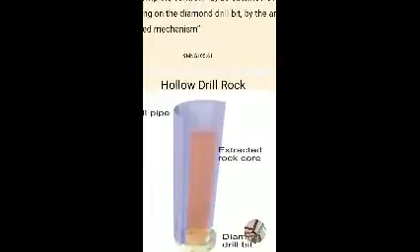There are two types of feed mechanisms. I would like to tell those mechanisms a little while after. To understand easily, here is a figure.

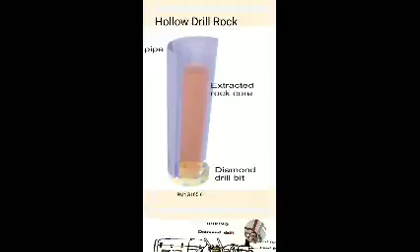This is the diamond drill bit and this is the hollow half-cutted drill rod. You are seeing the half-cutted drill rod. The pink color portion is called, do you know what it is? It is core, a cylindrical stratum of rock mass obtained during drilling with hollow drill rods.

If it rotates, the drill rod penetrates into the ground. The uncutted or cylindrical portion enters into the hollow space of the drill bit. This is called core.

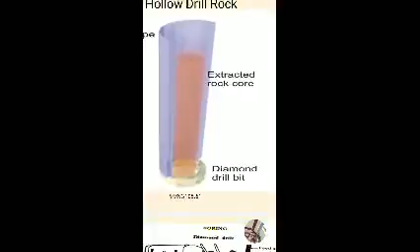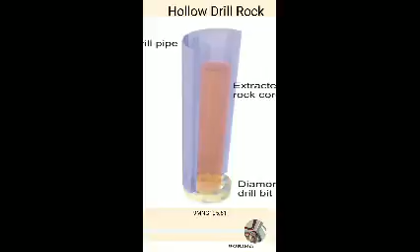You can understand easily by seeing this figure. This pink portion is called core, and this blue color rod is half-cutted. To understand easily how the core will be there, the figure is shown in half-cutted or sectional view.

So, in rotary method of drilling, to obtain the required pressure, a mechanism called feed mechanism is attached to the drill machine. There are two types of feed mechanisms: one is screw feed mechanism, another one is hydraulic feed mechanism.

If the depth of the hole is very short, up to 60 meters, screw feed mechanism is useful. If the depth of the hole is greater than 60 meters, hydraulic feed mechanism will be used.

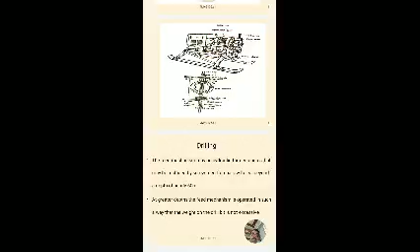Here is a small difference. In case of screw feed mechanism, it exerts the pressure only. In case of hydraulic feed mechanism, as discussed in the previous class, if the depth of the hole increases, the number of rods attached will be more. If more rods are attached, the weight of the entire column of drill rods is more, and this weight itself produces huge force, huge pressure.

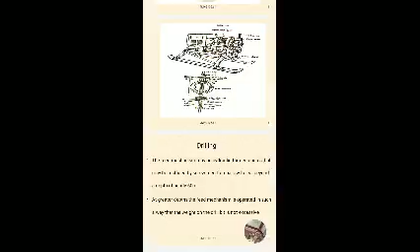Generally the rotary drilling is adapted where the depth of the drill hole is more. If the depth of the drill hole is more, the entire column of the drill rod's weight is more, and this weight exerts a huge pressure on the drill bit.

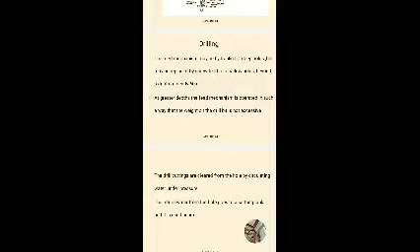So, the pressure exerted by the entire column of the drill rod is more than the required pressure. Some of the pressure must be relieved from the bottom of the drill bit. For this purpose, hydraulic feed mechanism is used, in such a way that the weight on the drill bit is not excessive.

As usual, the drill cuttings that arrive due to the abrasive action of the drill bit, or sludge, will be sent from the hole to the surface by sending water through the hollow drill rods.

While coming, the water from the bottom of the hole between the surface of the drill rods and the circumference of the drill hole formed, the entire water will come out along with it, lifting the broken pieces of rock or sludge which arrived during the cutting of the hole.

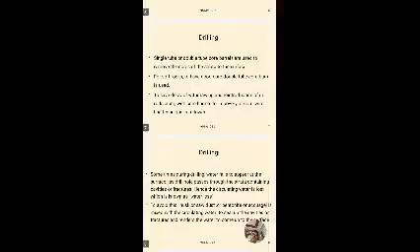For getting the core, only diamond drilling is suitable, so diamond drilling is used. The arrived core is obtained from the core barrels. There are two types of core barrels: single tube core barrel, double tube core barrel. Single tube core barrel is used whenever the

acquired core is hard enough. If it is soft, double tube core barrel is used.

There is another type of extracting the core, the wireline technique. A catcher is sent through the hollow drill rods and it will catch the core.

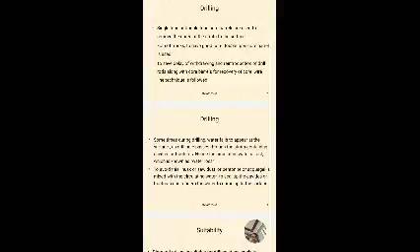The other important thing is that sometimes, while water is being sent into the hole, some of the water may disappear because of the cracks present in the circumference of the drill hole formed, because of the fissures, because of the cracks, because of the holes. Water sent into the cracks only, but it will not come to the surface.

Because of water loss, husk or sawdust or bentonite aquagel is mixed with the circulating water to seal the cavities and fractures, and render the water to come up to the surface.

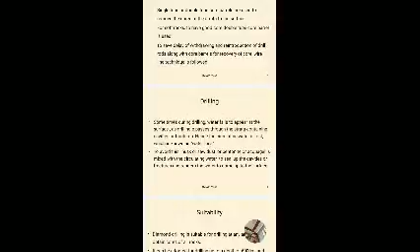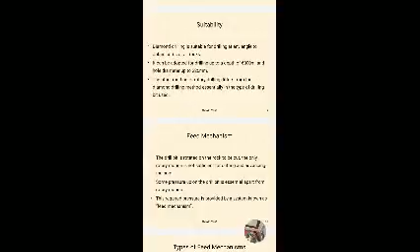Diamond drilling is suitable, as discussed yesterday regarding the applications of diamond drilling. Up to 6000 meters, 225 mm diameter, wherever the core is necessary, diamond drilling is used, and whatever be the hardness of the rock, it will be used.

The next topic is feed mechanisms. Feed mechanisms are an essential part where a drill bit is rotated on the rock to be cut. Only rotary motion is not sufficient for advancing the hole. Some pressure upon the drill bit is essential apart from the rotary motion. The required pressure is provided by a system known as the feed mechanism.

The feed mechanisms are of two types: screw feed mechanism and hydraulic feed mechanism. For shallow holes, screw feed mechanism is used. For deep holes, hydraulic feed mechanism is used to act against the heavy pressure of the entire column of the drill rod. If it is more than 60 meters, we go for hydraulic feed mechanism.

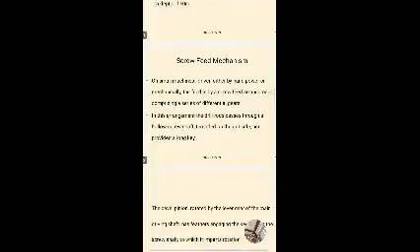A screw feed mechanism in small machines is driven either by hand, power, or mechanically operated. The feed is by a screw feed arrangement comprising a series of different gears. In this arrangement, the drill spindle passes through the hollow shaft, threaded on one side and provided with a long key.

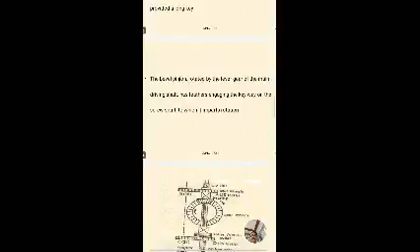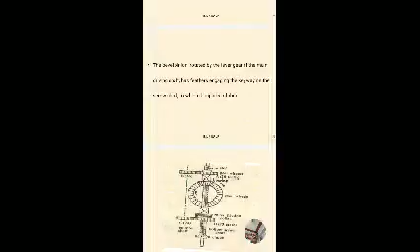The bevel pinion, rotated by the bevel gear of the main driving shaft, has feathers engaging the keyway of the screw shaft, which imparts the rotation. Here you are seeing...

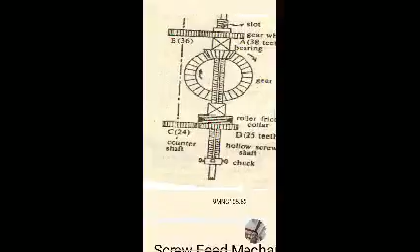There are four gears here: A, B, C, D. Here is the wheel, this is the slot, this is the chuck, hollow screw shaft, one inside another. Here the screw shaft bevel gear is there. These four, A, B, C, D: A and D are on the same shaft, B and C are on the same shaft.

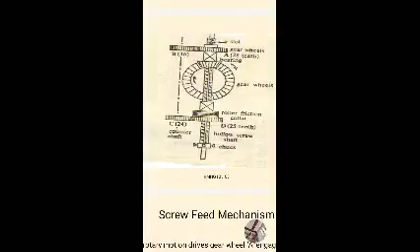A and B are attached, and C and D are also attached. Here you are seeing the bevel gear. There are 3-4 types of gears: spur gear, bevel gear, and so on.

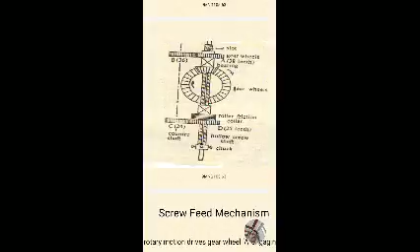As already discussed in the previous chapter, energy is transferred from one place to another by means of three ways: either by belt, by chain, or by gears. Gears are the most efficient method.

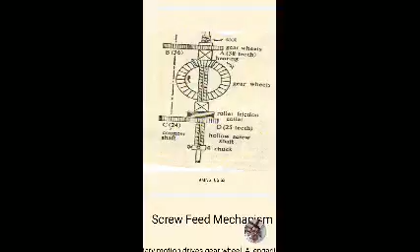Here the rotary motion of the energy is transferred from the motor to these gears by means of a bevel gear. The advantage of the bevel gear is that it transfers power from one plane to another plane. This is the salient feature of the bevel gear.

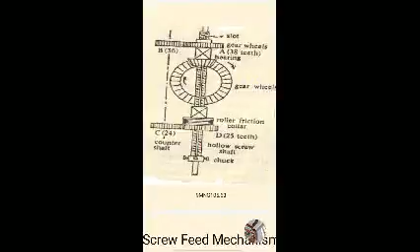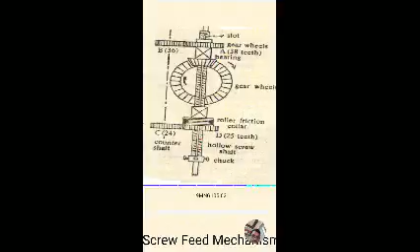This bevel gear rotates. Gear A will rotate; it has 38 teeth. It is attached to gear B. The main aim of the gear is to transfer power with the desired speed ratios. Here also the speed ratio will come into action.

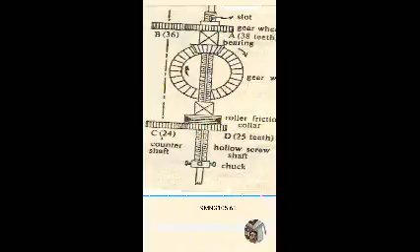To understand better, here in the drawing also these lines indicate the shaft. Whenever this bevel gear rotates, this shaft will rotate.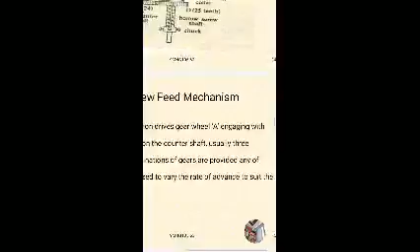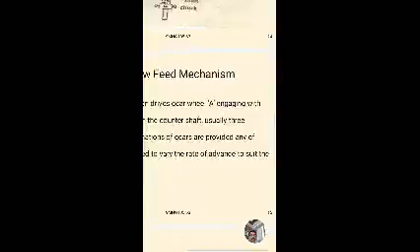The rotary motion drives gear A. The engaging gear will be on the counter shaft. Usually 3 different combinations of gears are provided any of which is used the variation of rate of advance to suit the type of rock. Gear B through the counter shaft drives C, which engages a fourth wheel D, threaded internally to fit the threads

of the screw shaft. The number of teeth on gears A, B, C and D as shown in the diagram are 38, 36, 24 and 25.

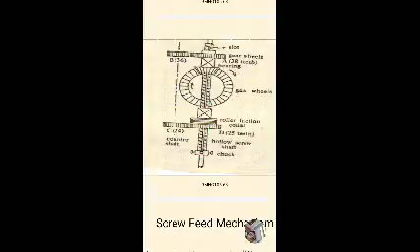Here it rotates one revolution. If it rotates one revolution, these 38 teeth will rotate gear B with 36 teeth. So if it turns one complete revolution, gear B turns one revolution and two teeth. Are you catching my point?

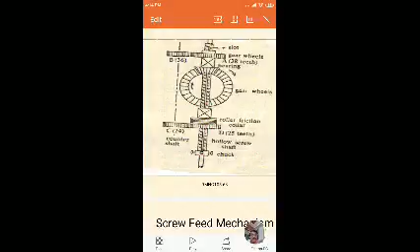This concept will come in mechanical engineering, in power transmission, there you can understand easily. Here B and C are rotating at the same speed on only one counter shaft. If B rotates one complete revolution, C also rotates one complete revolution, because the shaft is the same.

At the same time, C also rotates one complete revolution, and D has more teeth than C. If it rotates one revolution, it will not complete one full revolution - one tooth will be fewer than C. For one complete revolution of A, D will rotate like this.

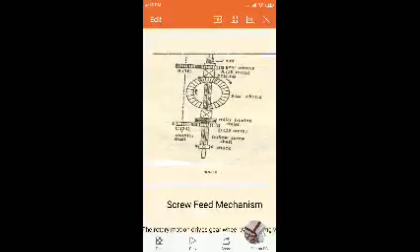The number of teeth in gears A, B, C and D as shown in the diagram is 38, 36, 24 and 25. For one revolution of A equals 38 by 36 revolutions of B, and C equals 38 by 36 revolutions into 24 by 25 revolutions of D. Therefore, for every 75 revolutions of A, D will rotate 75 into 38 by 36 into 24 by 25, which is equal to 76 times.

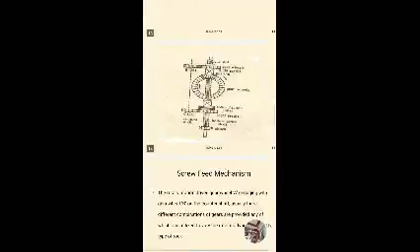Consequently, for every 75 revolutions of A, D revolves 76 revolutions because of this gear arrangement and the variation in the number of teeth.

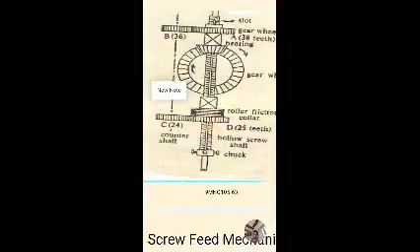Because this hollow shaft has screws, the difference between two consecutive screws is called the pitch of the screw. If you rotate a nut on the screw for one complete revolution, the screw travels a distance.

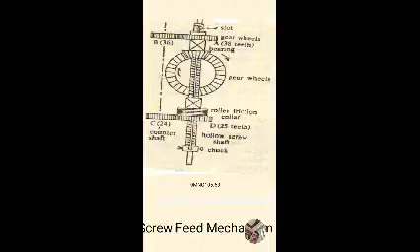Are you catching my point? For one complete revolution of A, D will rotate 75 revolutions... D will rotate the 76th revolution because of the teeth arrangement provided on these shafts. The hollow screw has screws and a pitch - the pitch of the screw is nothing but the distance between two consecutive screws. For one complete revolution, the screw will travel a distance equal to the pitch of the screw.

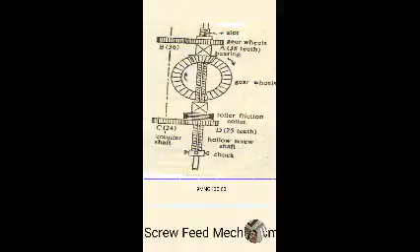Here, the number of revolutions in A and D are different - for every 75 revolutions of A, D rotates 76. For the excess revolution of one revolution, this portion will come forward. It creates pressure on the chuck. Thereby, due to the pressure transmission from the chuck to the drill rod, it creates excessive pressure on the drill bit. Are you catching my point?

Consequently, for 75 revolutions of A, D revolves 76 times, and the screw shaft moves forward by a distance equal to the pitch of the thread - this is 6 mm. The rod is advanced 24 mm for every 300 revolutions. That's why it creates the excessive pressure. This is the reason behind the operation of the screw shaft.

Screw feed mechanism in boring. This is very, very important in every exam - either mid or end exam. Out of 2 feed mechanisms, there is more probability to get one question from screw feed mechanism or hydraulic feed mechanism.

Okay, this is the screw feed mechanism. The movement of the screw shaft is imparted to the rods by the chuck. The pressure gauge attached to the roller friction collar records varying pressure. The setting of the feed is decided by sliding a lever to a desired position for locking the appropriate loose gear, giving the speed required for the ground being bored. The feed ratio may be changed while the drill is operating, causing the drill rods to advance rapidly.

So, because of this pressure in the screw feed mechanism, because of the excessive revolution of wheel D - for every 300 revolutions, it revolves 4 more revolutions than A - because of that, for 4 pitches of the screw, which equals 24 mm, it advances more than the first wheel. It creates the pressure. Okay, this is the principle behind the screw feed mechanism.

The other important one is the hydraulic feed mechanism, used for deep boreholes, not for shorter boreholes. The figure shows the general principle of a typical hydraulic feed mechanism, excluding the engine and frame. Here you are not seeing any engine, only the feed mechanism. There are different parts here.

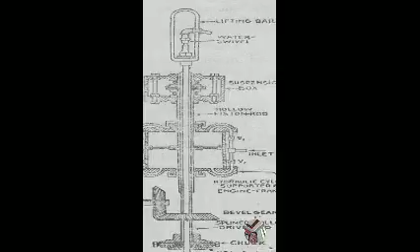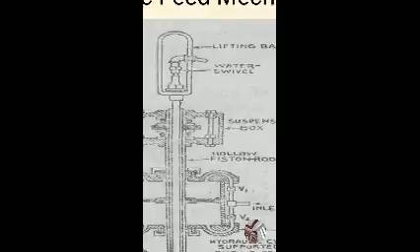This is the lifting bail, which lifts the entire feed mechanism. Here is a water swivel joint to enter the water into the borehole.

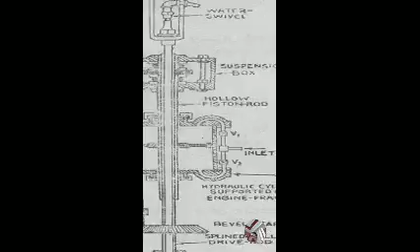This is the suspension box. This outer portion is the hollow piston rod, and this is the piston rod. Here there is a piston and chambers.

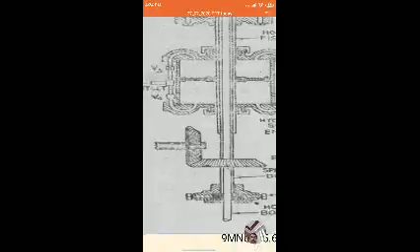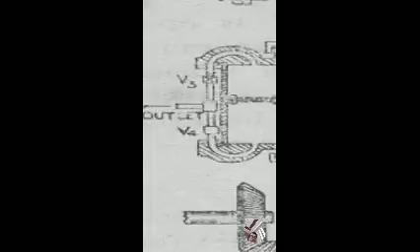Here V1, V2, V3, V4 are the four valves. From this side, this is the inlet and this is the outlet. This is the piston chamber.

A hollow piston rod is attached to this piston. The water enters from here, from the upper side and lower side. Water inlet is downside, this is upper side. Like that, this water will come to the V3 and V4 chambers also. If you see, it looks like four chambers are there.

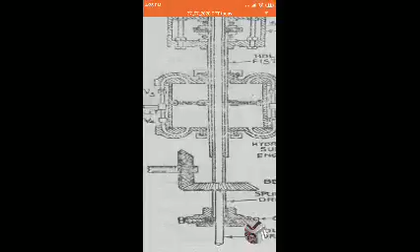This is the hydraulic cylinder supported by the engine frame. To rotate the drill rod, a bevel gear mechanism is used - you are seeing this is one gear and this is another gear.

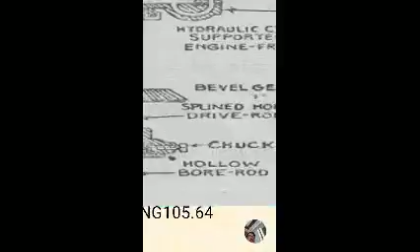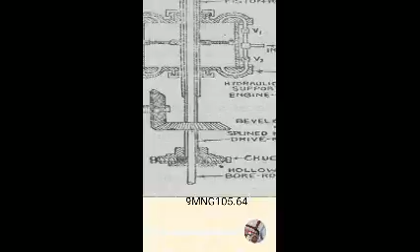As usual, chuck and hollow bore rod. There are three types of rods. Bottom chuck, here chuck, bevel gear, hydraulic cylinder, and ball bearing suspension. Here is the ball bearing, entire ball bearing suspension.

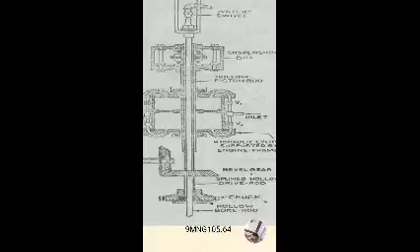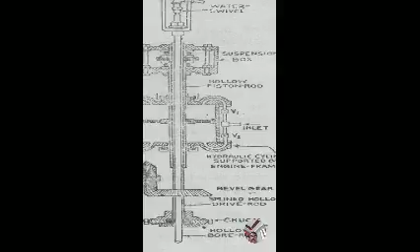There are three hollow rods, one within another: the inner bore rod, the middle drive rod, and the outer piston rod. This middle drive rod, and this upper portion is called the hollow piston rod. The piston is attached to the piston rod, the middle rod is attached to the hollow piston rod, and at the bottom the middle rod is attached to the bore rod.

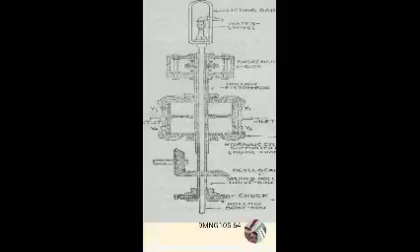Are you catching my point? To understand easily, it has three rods: one is the inner bore rod, second one is the drive rod, third one, one within another, is the piston rod. The piston rod is attached to the piston, the bore rod middle rod is attached to the piston rod, and the inner bore rod is attached to the middle rod.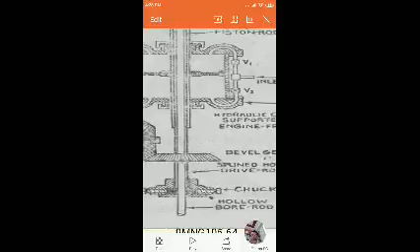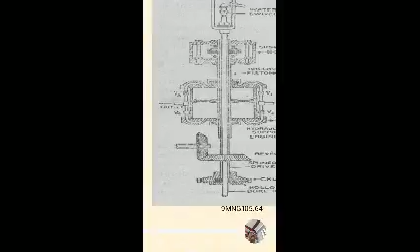If you send the water through the valves V1 and V3, by operating the valves we can send the water from either the upper chambers or the lower chambers only. It's up to you.

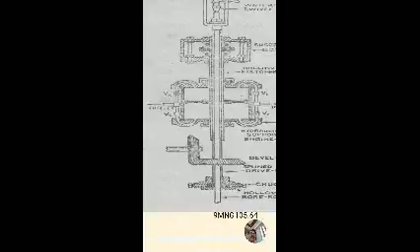This piston rod, because of the piston attached to the piston rod - the hollow piston rod - if the water is entered from V1 and V3, what happens? It creates pressure in the upper chamber, thereby it descends the piston rod.

Because of the attachment of the piston rod and middle rod, hollow piston rod and middle rod to the inner bore rod, the entire drill bit descends with high pressure. The pressure created in the chamber is transferred through the piston rod, middle rod, and inner bore rod, onto the drill bit attached at the end of the drill rod.

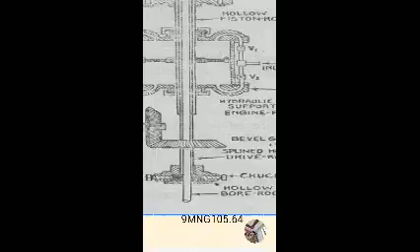The piston will lift the hollow piston rod, at the same time the middle rod. This middle rod will lift the inner bore rod. Are you catching my point?

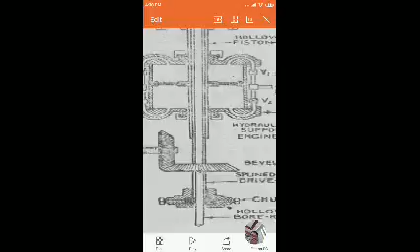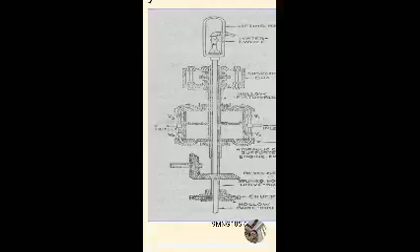This hydraulic feed mechanism is necessary whenever the depth of the hole is more than 60 meters. If the depth of the hole is more than 60 meters, the entire drill rod column weight is more because the number of joints to be attached to each other is more. For 60 meters, if you use 3 meter rods, nearly 20 rods are required to drill the hole more than 60 meters. This 20 rods' weight will be more.

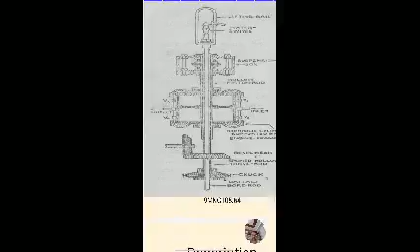It exerts pressure more than required. In that situation, a feed mechanism is used to lift or to take off the pressure on the drill rods. This device will lessen the pressure by lifting the bore rods.

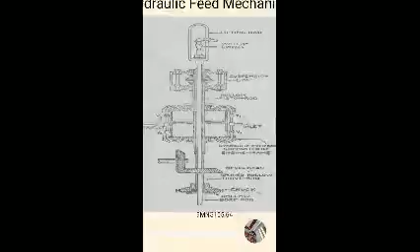Water swivel, a lifting wheel, always lifts the entire drill rod column. So this hydraulic feed mechanism is used for lessening, most of the times it is used for lessening the excessive pressure falling on the drill bit.

Thus, the weight of the rod may be partly taken off the boring tools by upward pressure, or the whole weight of the rods can rest on the boring tool, and additional downward pressure can be applied. In this way, complete control may be obtained over the pressure on the boring tool and over the rate of forward feed of rods.

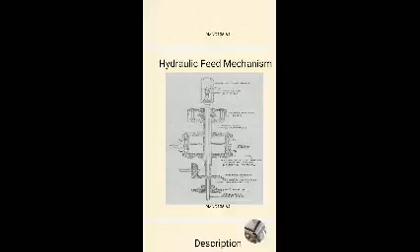This is - these two are very important: hydraulic feed mechanism and screw feed mechanism. You cannot see these two things, as they are attached on the inner side of the boring machine, so you cannot see these machines.

Okay, I hope you understand well regarding the hydraulic feed mechanism and screw feed mechanism. Hydraulic feed mechanism and screw feed mechanism. Okay, thank you.